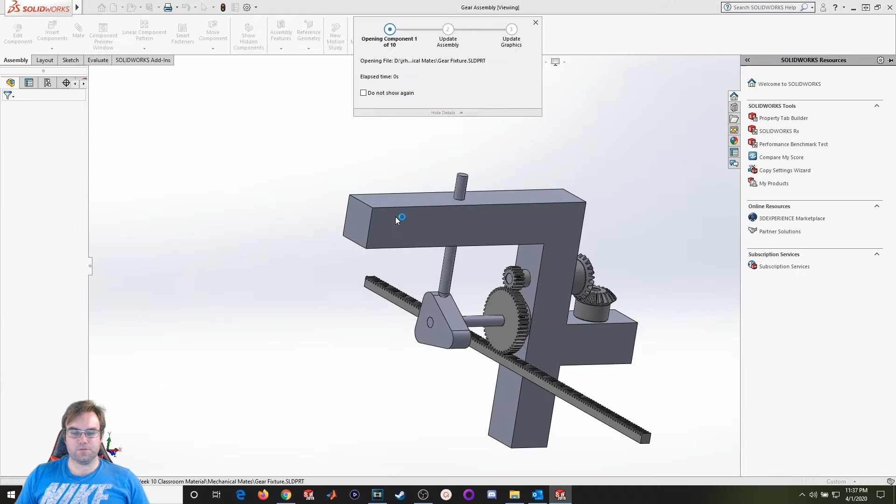So I'm going to go ahead and open up this assembly, this gear assembly. And we have a few components in here. So we've got a couple miter gears. We've got a rack and pinion, and we also have a camshaft. So we're going to be going over those mechanical mates.

So let's start right here. So under mates, I've got mechanical mates. I've got cam, slot, hinge, gear, rack and pinion, screw, and U-joint. So for this lecture, we're only going over rack and pinion, gears and cams. So for a gear mate, you want to grab two circular surfaces. Doesn't matter what, because you're going to manually input the gear ratio.

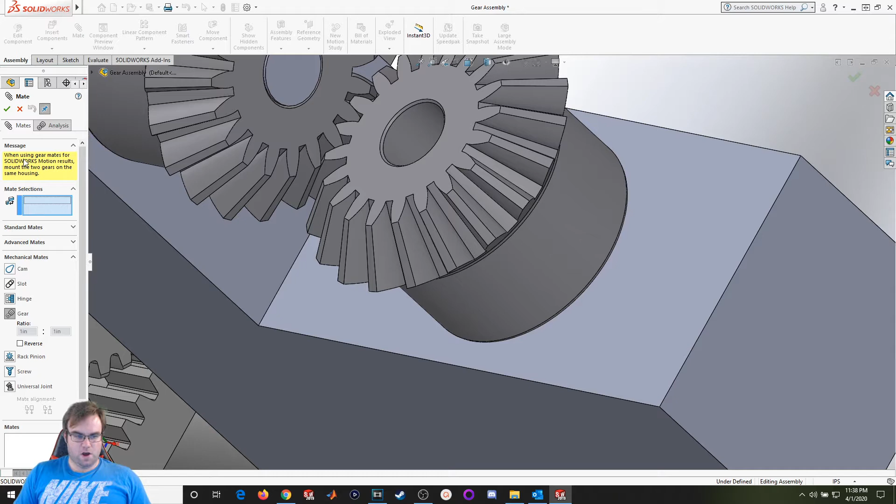So for this one, I'm going to select this surface and this surface. And it's going to import the ratio as the diameters of the surfaces that you've selected. But it's always best to go ahead and manually input them. So this is going to be a 1-to-1 gear ratio. So I'm going to go 1 to 1. And I'll hit OK. And now if I rotate it, they're going to rotate together.

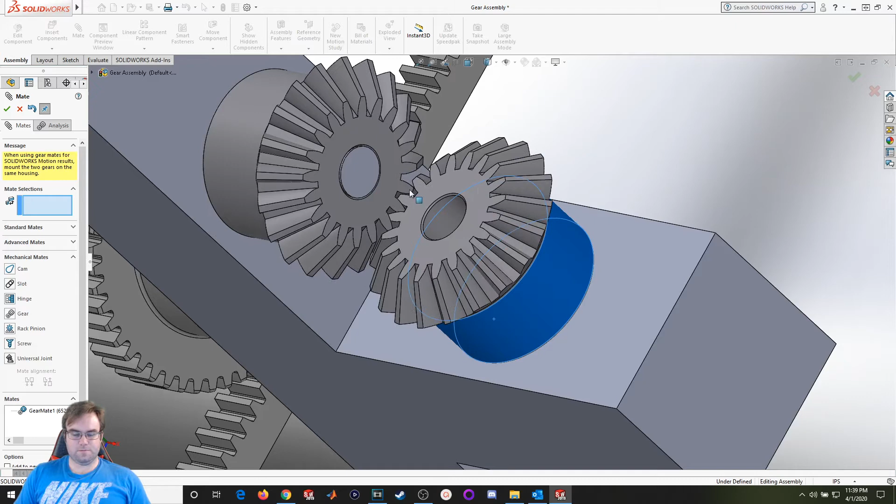Let's continue on. So I'm going to now put another gear ratio between this surface and this shaft. So make this gear mate. I want this to be 1-to-1. Now I want to click on reverse because I want it to rotate with the gear. So let's go ahead and hit OK.

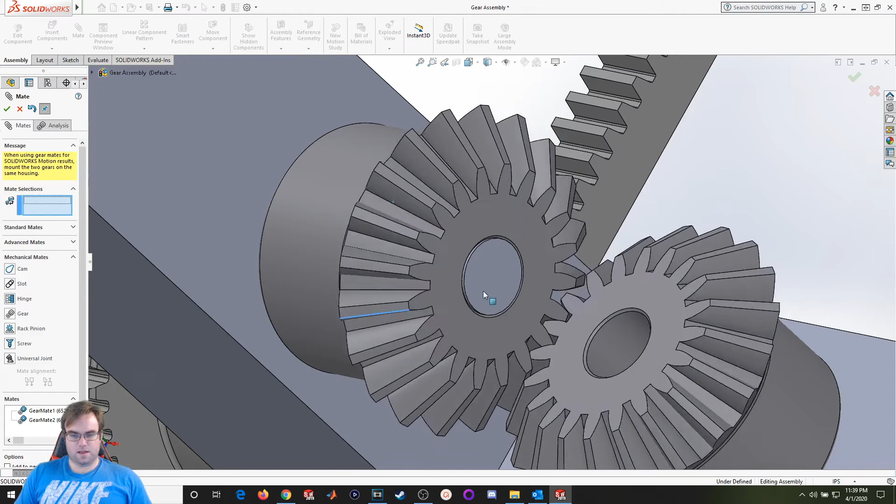It's kind of hard to really see it. Actually, no, it's going the wrong way. So I'm going to go back into the mates and I'm going to uncheck that reverse so it's rotating in the right way. So okay, now the shaft is rotating with the gear.

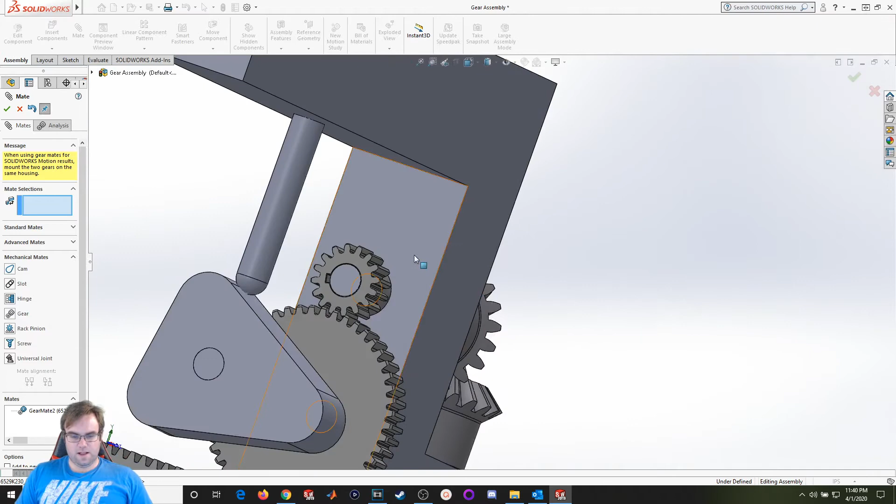Alright, let's move on. Let's go ahead and attach this gear to the shaft. So I'm going to add another gear mate. I'll select this surface and I'll select this surface as well. And I'm going to put in a 1-to-1 gear ratio. I don't want it to be reversed. I want to make sure that it's rotating in a way that makes sense now.

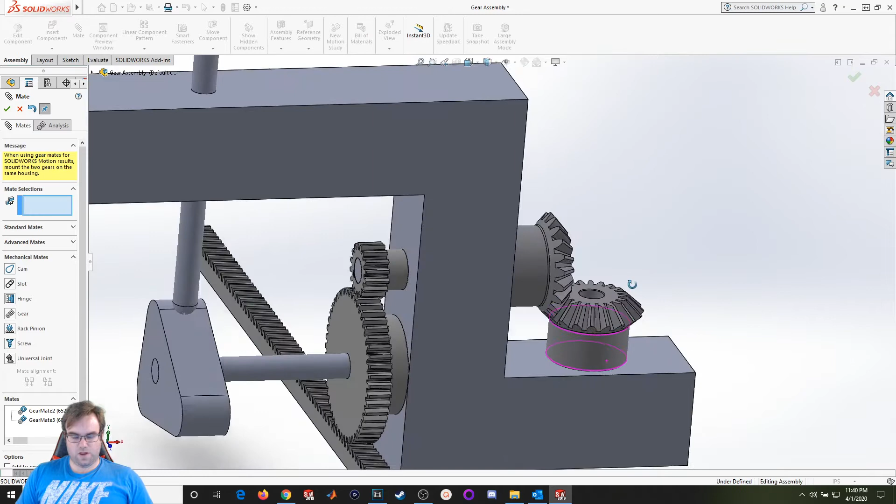So start rotating this gear. It rotates that first miter gear properly, and this miter gear in the back is also rotating properly.

So let's move on. Now we've got a little bit of a different situation here. So we've got a much larger gear and a smaller gear. So we're going to have a gear ratio that's not exactly 1-to-1. So I'm going to go ahead and find this particular part number off McMaster-Carr. Let's take a look. Let me go and pull that up real quick.

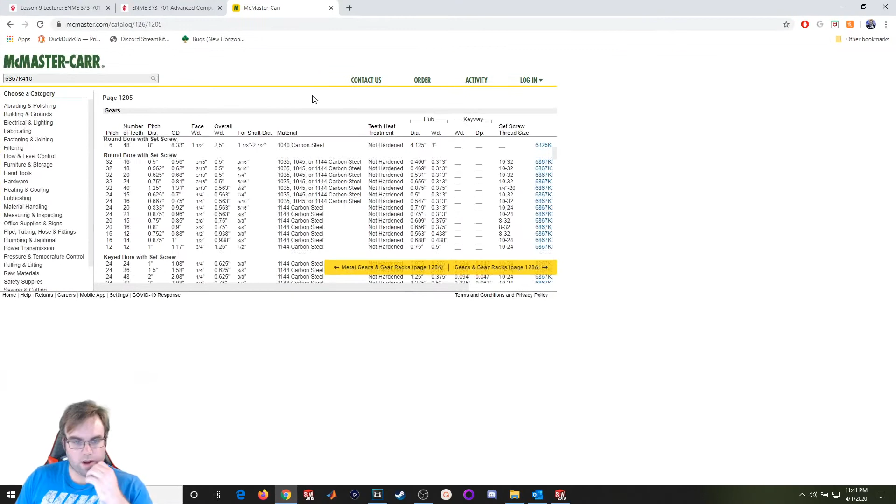So let me go. I'll input it off the page. So this is part number, let's see, 6867K410. Let's look that up. 6867K410. We'll search for that. We pull it up. So take a look at this.

So 16 total teeth divided by 1 diameter gives us a pitch of 16. So in order to know that these two gears are going to match together, the pitches have to be the same. So I'm going to guess, I think this is going to be a pitch diameter of 3, but let's just double check it. So this part number is 6867K520.

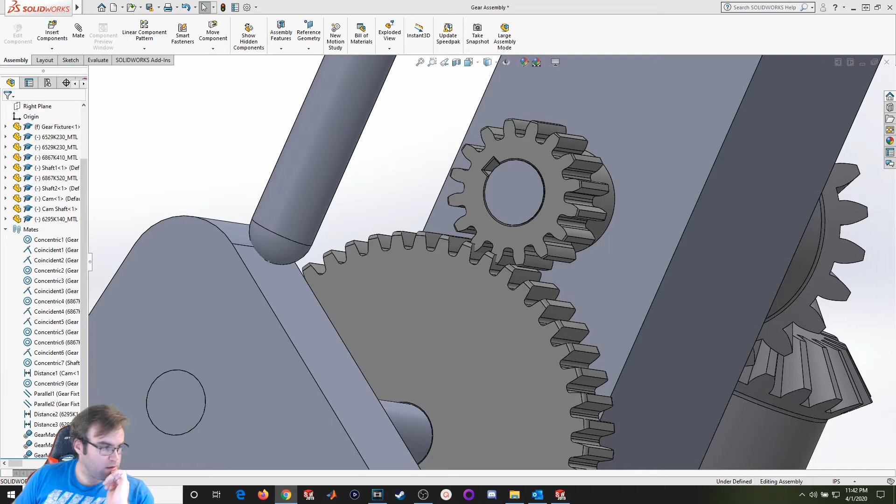Let's go ahead and pull that up. We'll take a look at the product detail. Okay, so the pitch diameter is 3, and we see that the pitch is also 16, so we know the gears are going to mesh. So we're going to want to have a gear ratio of 1 to 3.

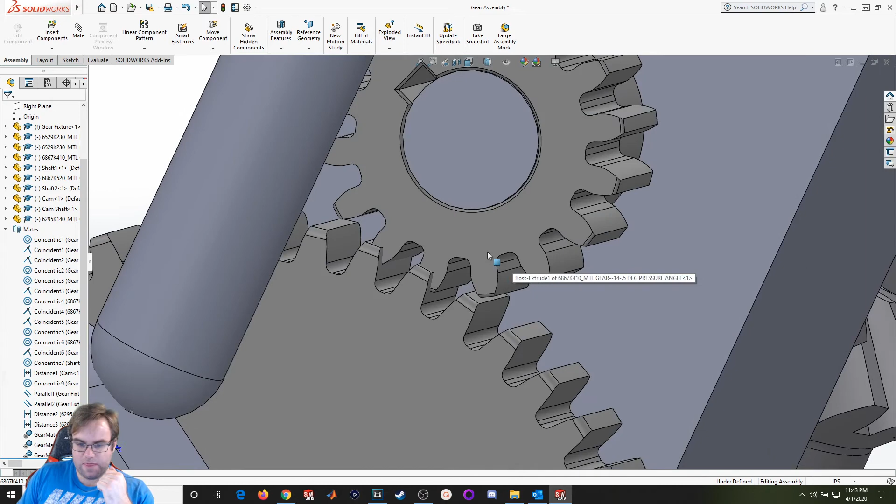So before I do that, I'm going to kind of line this gear up so it's meshing well. Looks nice and neat and professional. That looks like it's good. Now I'm going to put the gear ratio in. So I'm going to go mate, mechanical mates, gear. I'll select this surface and this surface.

So for this first one, I'm going to put 1, and the second one, I'm going to put 3. And I'll hit OK. Now let's see if they rotate properly. And they do. So let's go ahead and keep going. We're going to go ahead and put another gear ratio in between this gear and this shaft.

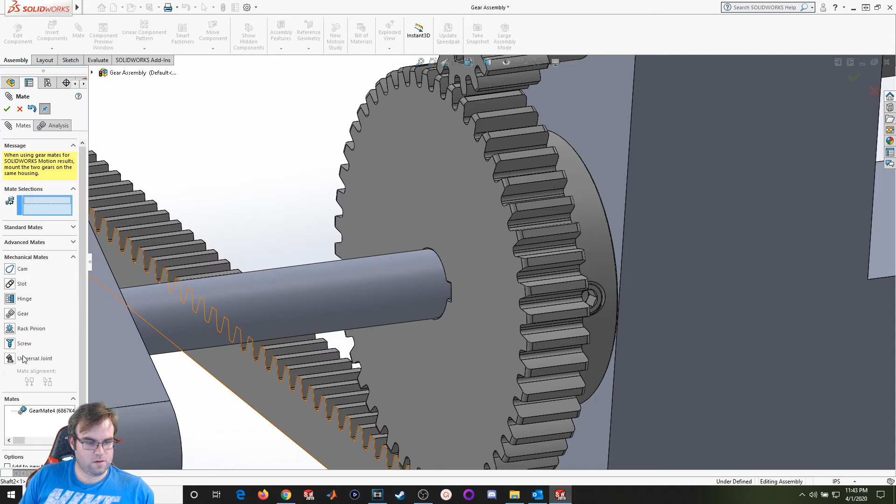So gear, this, and this at a ratio of 1 to 1. Okay. It's kind of hard to see, but it's definitely rotating in the right direction. So now we're going to move on to this cam.

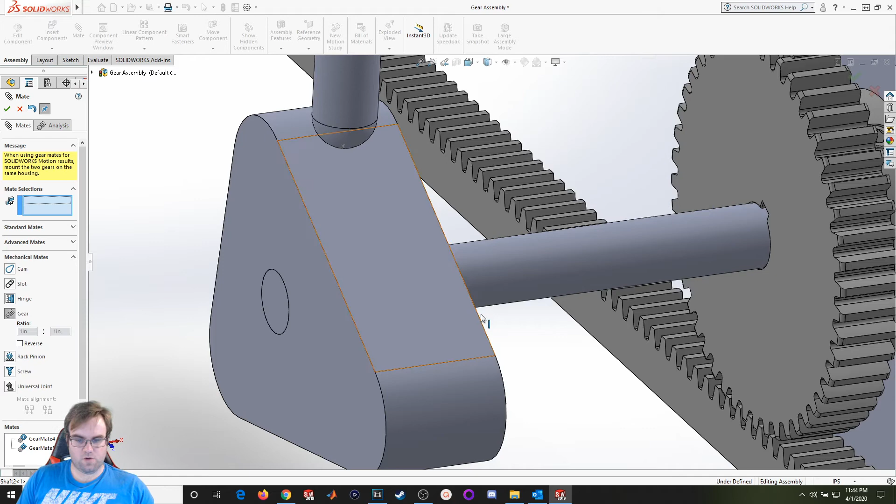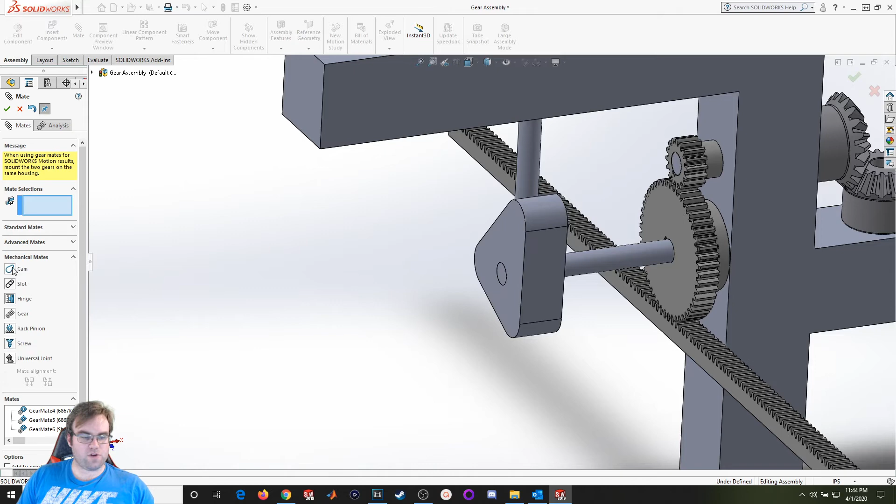So now I'm going to introduce the cam mate, where it'll have this shaft go up and down along the surface. So let's zoom in really close to this shaft. You're going to notice that there's a point here. So in order for a cam mate to work, it's a point that rides along on a surface. You don't want to use surface-to-surface cam mates. That's not going to work out well. It's always best to go ahead and use a point.

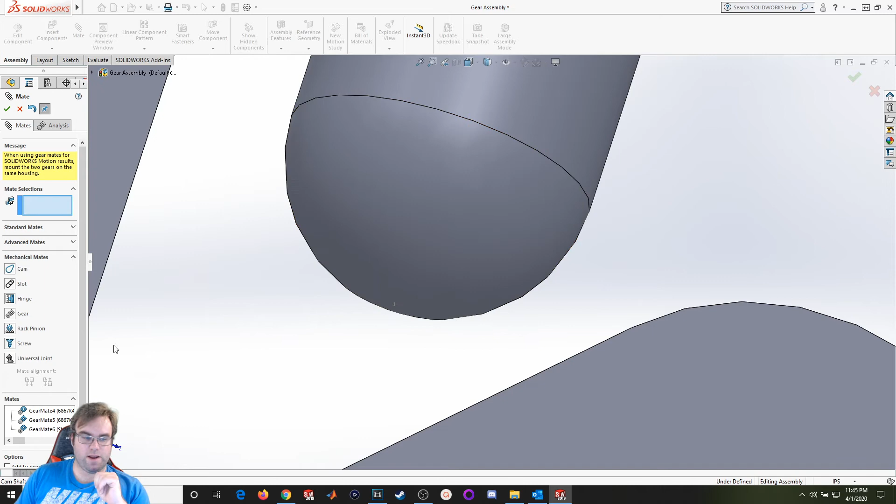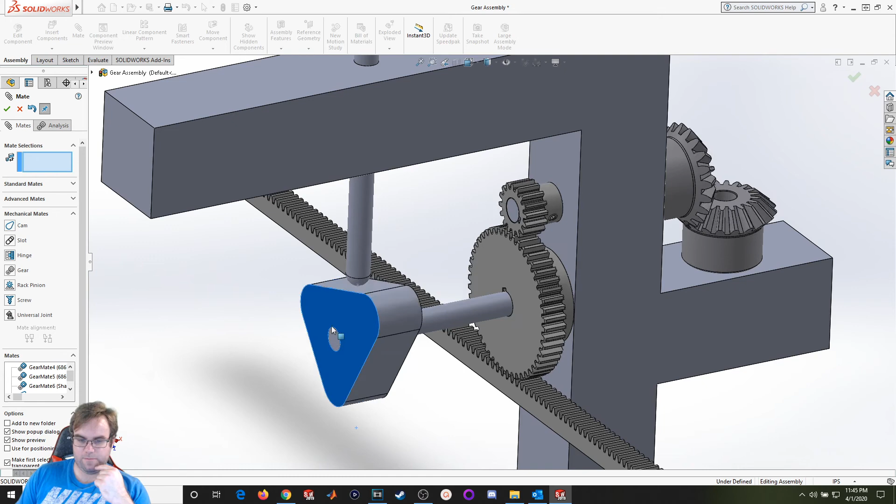So I'm going to click on cam. So for the cam path, I'm going to select this surface. It's going to go all the way around. And for the cam follower, I'm going to grab this point. And that's going to bring it in line with the surface. And I'll hit OK. And now when I rotate, the shaft will follow along on the cam. It's maybe kind of finicky because of the angle that I'm doing it at. Now if I do it over here, that'll work a lot better.

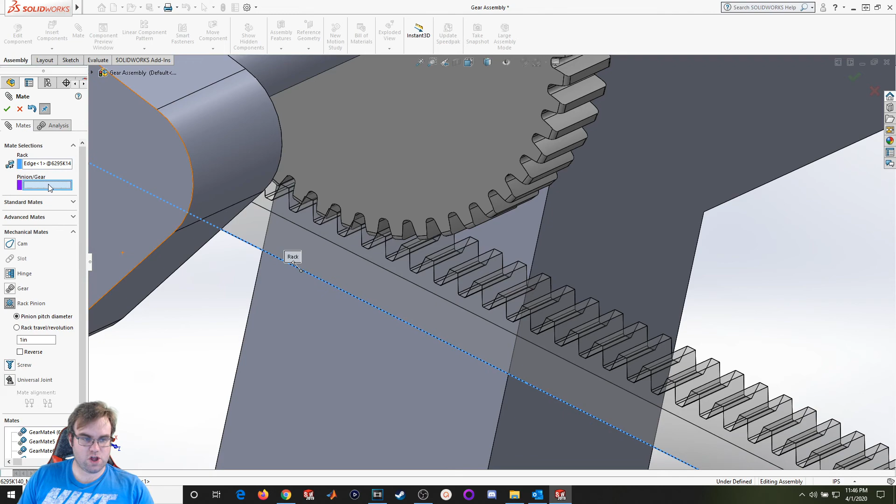Okay, now let's go ahead and take a look at this rack and pinion. So let's go ahead and click on the rack and pinion mate. So let's see. I got the rack as this edge. You want to grab an edge, and you want to grab the circular surface. Pinion pitch diameter. So let's go ahead, and I believe the pinion pitch diameter is 3. So I'll hit 3, and I'll hit OK.

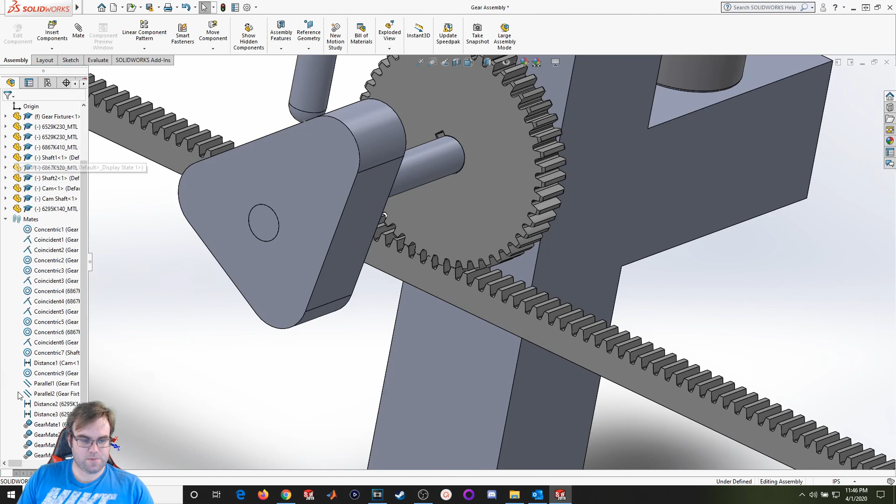Now let's see if it moves right. It looks like it's moving at the right speed, but it's moving in the wrong direction now. Let's go back into the rack and pinion mate. We're going to reverse it. And now I bet it'll move nice and smooth.

Alright, so that's going to do it for this video.